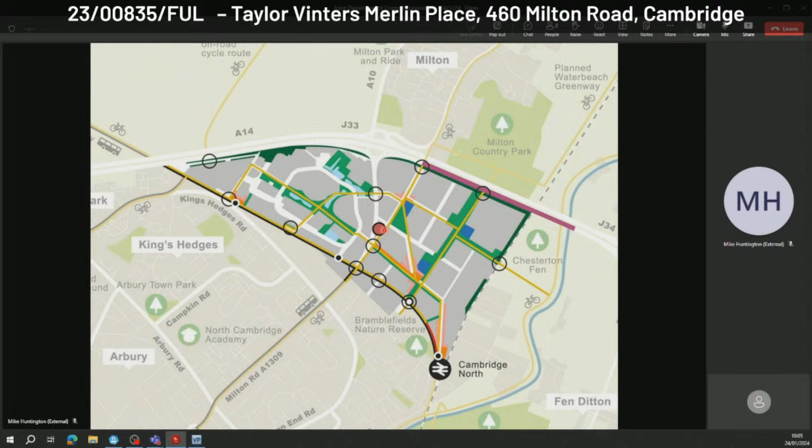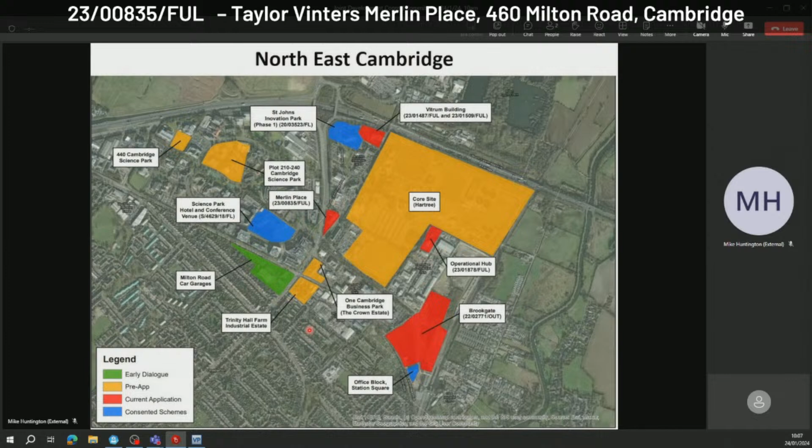Yep, closer. Is that better? Thank you.

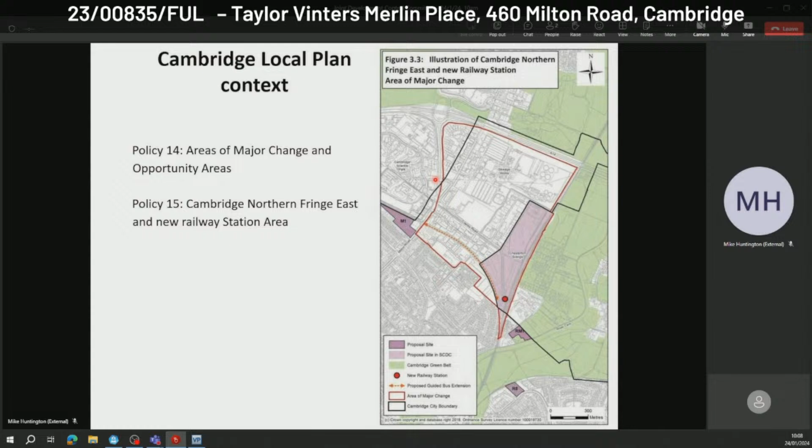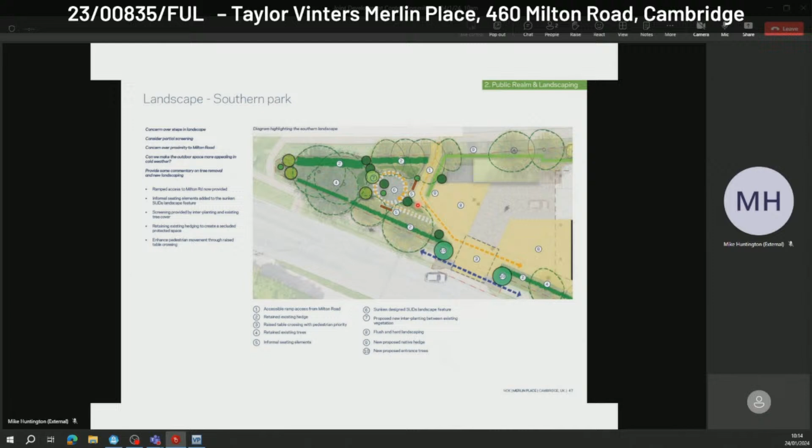This plan just shows in overall terms how the site fits in with the wider trees and landscaping of the site, and what we've got with the removal of the cycle stores in this area, a much more generous space, public realm space, all around here, and then this is an area where the trees and hedging will be retained, whereas previously it would have been removed.

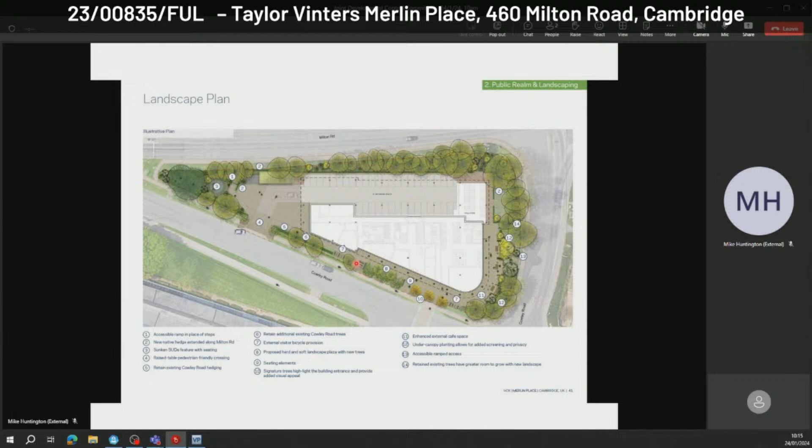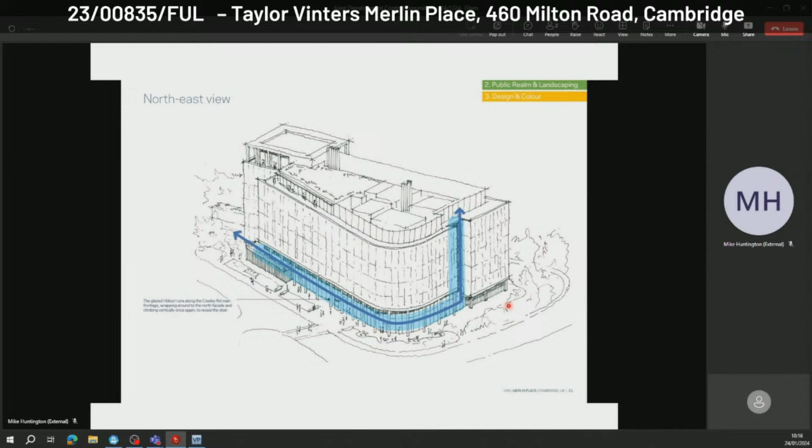And the same, this elevation shows the ground and first floor extending further than it used to do. It previously stopped here, and now it carries on all the way that way. And also, this area is now more visible because previously there were cycle stores in this broad location. This plan just shows a bit more information. There's also additional green roof, and the back of house bit of the building has been rationalised, again, to reduce that inactive length.

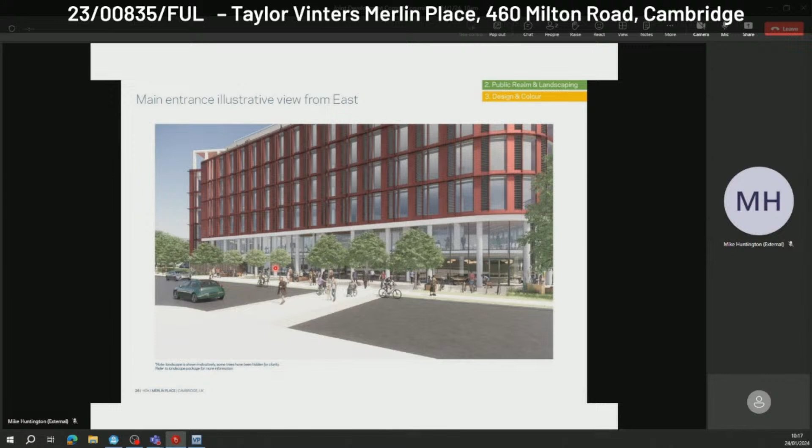This is an illustrative view because you wouldn't see that view that far away because there are buildings here, but it just shows a clear idea of the ground and first floor active zone and the change to it. In effect, all of this area here is now glazed where previously it wasn't in that form. This is a plan that shows an illustrative view that shows the crossing and the public realm in front. And again, that view as cyclists would find a way straight into the building here. That's their main location.

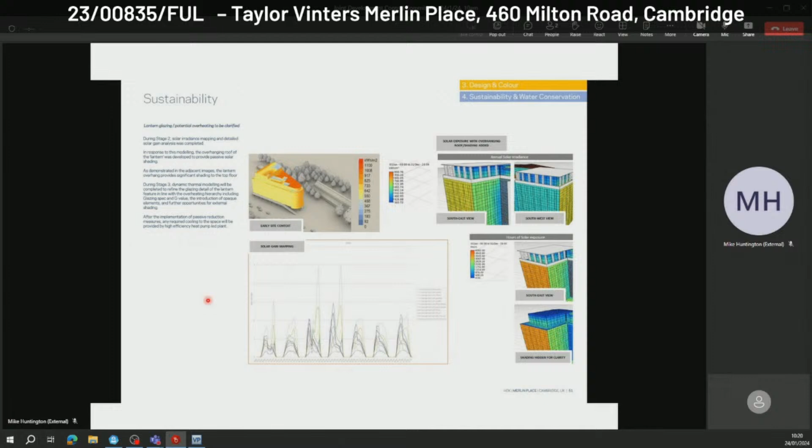And then the final point is about sustainability and the overheating element for the lantern feature. And they've addressed the issue in terms of the RIBA Stage 2 design work, and then an additional condition highlighted in my addendum report on condition 34, external shading detail, will address that issue. So during RIBA Stage 3, the applicant will undertake dynamic thermal modelling to refine the glazing detail of the lantern feature, including a glazing specification, opaque elements, and further opportunities for external shading. And that is just highlighting a bit more detail about that lantern feature on the scheme.

So just to remind members of the issues that we were asked to go back to the applicant to look at. There were access to the building for cyclists, pedestrians and scooters, review of car parking arrangements, the parity of esteem between cyclists, cars and pedestrians, a review of the public realm and landscaping, the need to retain existing trees and hedge, building design, colour and materials, vertical public realm, and updated sustainability strategy and water use strategy detail.

And that's the end. Thank you, Chair. Thank you very much, Mike Huntington. That's most helpful. So we'll now turn to the public speakers. We have with us Mr. Edward Joslin from Cadans, and do go ahead.

Thank you, and good morning. As mentioned in the previous meeting that we had here, my name is Edward Joslin, and I'm the Development Director for Cadans UK. Thank you for allowing us at Cadans to represent the scheme to the committee based on the deferral from the 18th of October 23 committee meeting. I've worked on the scheme for 2.5 years and exceptionally close with the team and the latest design iterations. The Cadans professional team and Cambridge Planning Technical Officers have worked through the deferral points from the aforementioned meeting, and we feel we've addressed points raised with full support from the planning team, and you have received a pack on this, and this predominantly focuses on 4 key points.

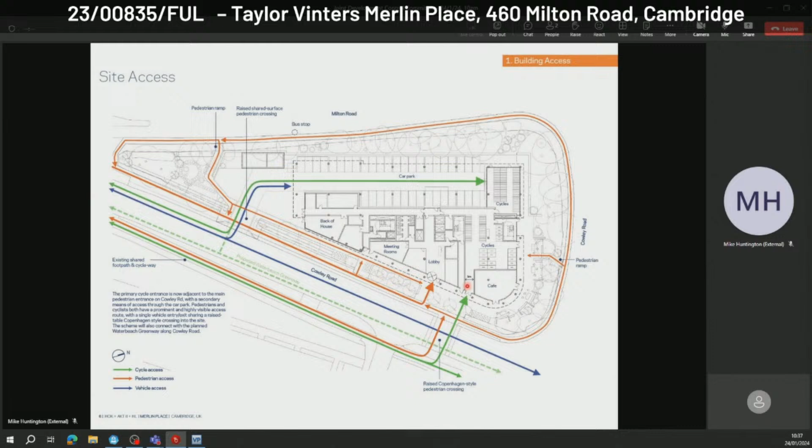Fine, okay. Councillor Smith. That's true. Okay.

I urged, Chair, when I used the phrase parity of esteem, Councillor Paul was quite right that it is a hierarchy. But I think what I was objecting to was the fact that there was undercroft car parking for the rich and out of the building cycle racks for the poor, and it just looked like rather a feudal type of arrangement. So I thought things needed to be balanced up somewhat, and this scheme achieves that.

It's very successful. To have covered cycle storage within the building and to have much, much improved access arrangements is a very positive development. And I think that we should thank the developer and the officers for working together to achieve a much, much more successful layout and provision. I mean, this is, if you like, the power of deferment.

I think that it was a frustrating situation, and I'm sure the developer's been frustrated by the delay, but we didn't have a pre-app presentation when the issues that had been raised could have come out. It could have saved us all time. But notwithstanding all of that, this is a building that's going to last for many years, and therefore I think the delay has been worthwhile from this point of view. So it's much more successful, and I'm very content with this. Thank you, Councillor Smith. Great, and I am too.

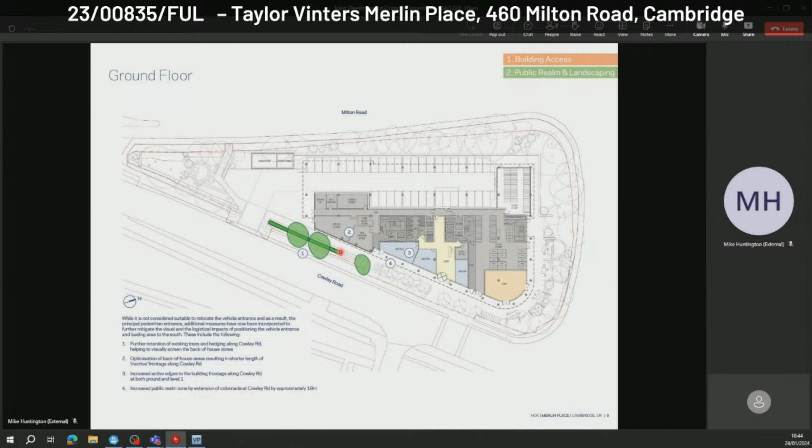But also, they've added, I've not got a plan on here that shows the extent of the trees being removed here, but really it's this area here where the trees would be removed, from that point to that point, to be replaced with new trees, plaza entrance trees type 1 and type 2. Can you just clarify for us what it means where they're circled in red? They're trees that were previously to be removed and they've now been retained. Okay, thank you. So again, some additional trees here which they were going to remove and they've been retained.

But it's this area here, that's the bit where the trees are going. And there's new hedge here, sorry Chair, there's a new hedge here as well, which wasn't there. This is what they had originally proposed in the deferred application. This is new hedge, but was in the initial submission. That's new hedge. This is existing hedge retained. But the change from October to now is that this is now being retained, and this is additional here.

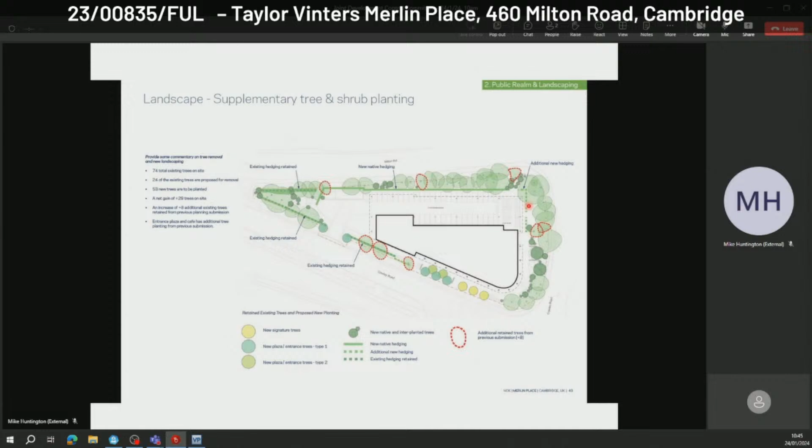If I can come in here, we were concerned originally that the hedge all along the eastern edge of the building was going to be removed. So what we have achieved here is the retention of that section near, what's it called, the plant, the southern end of the building. But the section along the northern part of the building is going to be removed, but there are trees going to be put in there. As we saw from the ground floor visuals, there will be trees along there to soften that frontage. Councillor Porro, do you want to come back?

Thank you. That's really helpful to see. I don't know if at some point you could find the original site photos, because they were really useful, because it kind of just gives that idea of which bits they are. Could I just check that you and the tree team are satisfied that the new trees going in are going to thrive there? Because obviously you mentioned restricted roots, but my understanding is the new building's even nearer to those roots. Are we satisfied that they'll be okay?

And I don't know, Toby's going to love me for this, you know the condition we've been using on planning committee where trees are planted next to new builds, that additional suitable root protection, if necessary, over and above building control, is put in place to ensure that those trees don't end up being felled in a few years when they start affecting the building. So I don't know whether we'd consider that as a condition.

I'm happy for that to be delegated to chair and vice chair if that needs to be looked into, but it's been something we've started using a lot in city planning just to stop this idea that you put a tree in and then 5 years later they go, oh, it's making a crack in my building and the tree comes down, which I'm sure isn't the intention of the applicant, but I do think because this does hinge on biodiversity, I would feel more satisfied if we were able to do that.

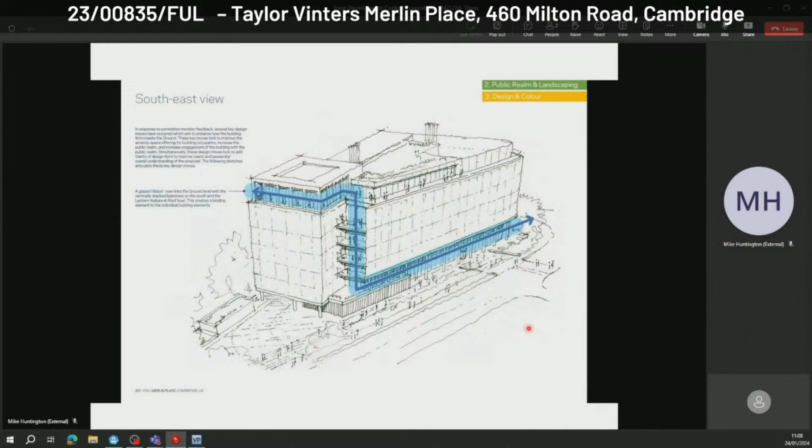my main concern is, as other councillors have said, there is a potential for this structure on the top of what might otherwise be a design that looks coherent.

Members, please, would you stop chatting? Thank you.

Sorry, there is a potential for this structure on the top to look like a cardboard box on the top of an otherwise coherent building. So what I would ask is that care is taken. As I say, I'm not wild about the lantern, but if members approve it,

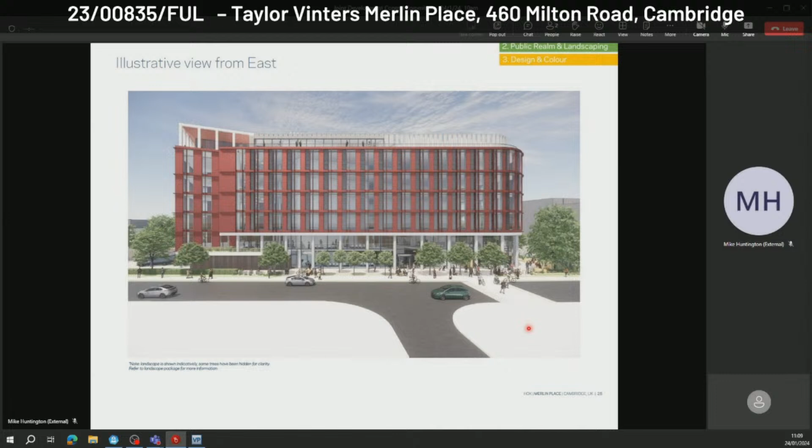then can you make every effort to make sure that this is a structure of good quality, that doesn't look like an add-on, that's striking, but part of a good quality building. So I would just ask for good design there, and not particularly that upticked promontory at the front. I prefer it to be horizontal. Right, Councillor Hawkins.

Thank you, Chair. I know I don't have that many more years left, but I also know that some of the designs we seem to get these days, just going on from what others have said, it might look blocky, it might look blunt. Sorry, I'm struggling to hear you, Councillor Hawkins. The question that I wanted to ask, and I'll follow on from that if I may, is the design itself, has that been put to, I guess, the younger generation rather than us silver-haired people? Because they might have a different view, and this building is not for us, it's for them.

Mike Huntington can tell us. Thank you, Chair. I couldn't tell you whether any young people in particular have been involved in this process. The quality panel has looked at it. I couldn't tell you the age. There's no young people in the quality panel. Right. It's just gone through the normal consultation process. Okay. So, right, Councillor Baden. Sorry, can I come back? I wanted to come back. Sure. So my point is this.

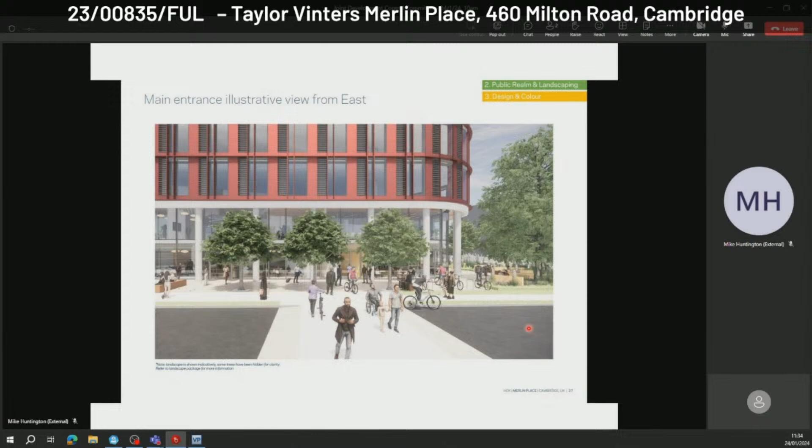The other one, the red one. That one, yeah, okay, so that is what Councillor Baigent said he liked and some other people said they liked, right? So let's call that red. Right, would you then move on to the next option? That I would call, let's call it dark copper. It's called version 2. Right, so have a look at that. And then there was another one that was lighter than that, wasn't it? Okay, carry on, 2 more. So that one's called copper version 1, which we'll call pale copper.

And then there was another one. What's that? That's the same as the previous one. So, as far as I can see, we've only got 3 colours. We've got red, dark copper, which is version 2, and copper version 1, which is pale copper. Am I mistaking it? Sorry, Chair. Oh, red version 2, sorry. Yeah, okay, that's red version 2. There's the version that was submitted, and then there's these 3 other ones that are all shown from this axonometric render. So we've got 4 options. Correct. Right. Councillor Smart.

I have to say, I just feel this is madness, Chair. It is not madness. I'm speaking, Chair. So, you know, firstly, never done this before. You've obviously checked with officers, so maybe it's a thing. But to have this committee deciding on a colour is very, very odd. But perhaps more importantly, we're deciding on very little evidence. We're looking at a screen from a distance with a bit of colour on it. So to decide the colour of a building in this way is just not reliable. And in any way, we're redesigning the scheme on the table. So we don't do that. So what are you doing, Chair?

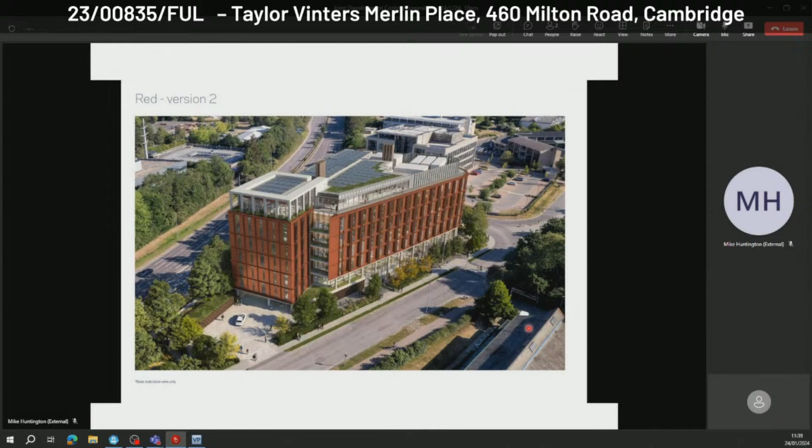What I would point out is that this is just one application, and there will be many applicants for the other parts of the North East Cambridge site who will have all sorts of their own views. However, we still need to look at item D, which related to the sustainability. Councillor Stobart. Sorry, the element was updated sustainability strategy and water use strategy.

Could I just refer you to the fact that we have got revised, both on page 23, but also revised in our addendum that we received by email, conditions 35 for grey water, 36 for rainwater and 37 for water efficiency.

So Councillor Stobart. Chair, if you'll indulge me for a second, I think Councillor Smart mentioned Cambridge Consultants who implemented one of the founding buildings on the Science Park, which was a lovely concrete structure set in rolling lawns. But for its time, downstairs labs, upstairs offices, it was absolutely radical. And it's nice to see this building actually marking a milestone in the development of Cambridge R&D buildings. Anyway, that's just an aside.

So my comments on sustainability, I think Councillor Baigent mentioned grey water and some question marks over grey water, but I believe within a building, if the system is completely self-contained, grey water is okay. Just if you're expecting a water supplier to supply grey water, that won't happen because of the current legislative position, but entirely internally it's fine.